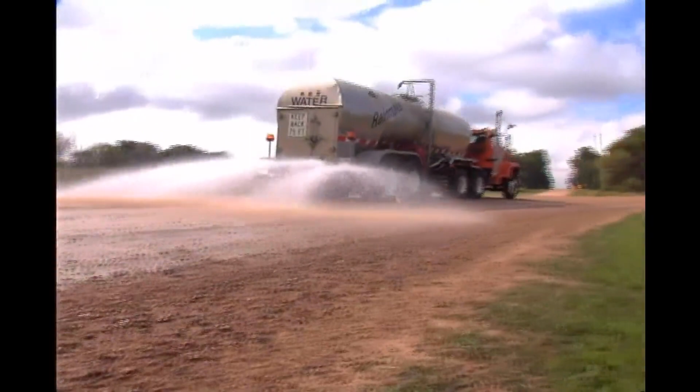When you bring in fresh gravel to resurface a road, you have to consider its moisture content. If it's too dry, you'll need to add water so it will take shape and compact. But if it's too wet, you'll have to work it with your motor grader so that some of the moisture will evaporate. Okay, let's review the main points about surface gravel.

About half of all problems on gravel roads are because of poor gravel, so be sure that you get good surface gravel. Each agency should adopt a surface gravel spec, and base aggregate is not good surface aggregate or surface gravel. You need the right gradation. Ideally, every piece of good surface gravel is smaller than 3/4 inch, and about 8 to 15% of your gravel should be fines. And you want enough clay in the fines for good plasticity.

You can't dig good surface gravel out of the ground. It has to be correctly processed by people who know what they're doing. When you get to the work site, you may have to adjust the content to make it work right and hold its shape. After you've reshaped the road and placed fresh gravel, you need to consider dust control. That's what we'll look at in the next section.

Okay, I'm going to resume. Okay, that's that problem. I'm going to resume sharing my screen. Okay. If you'll go to the aggregate classification map.

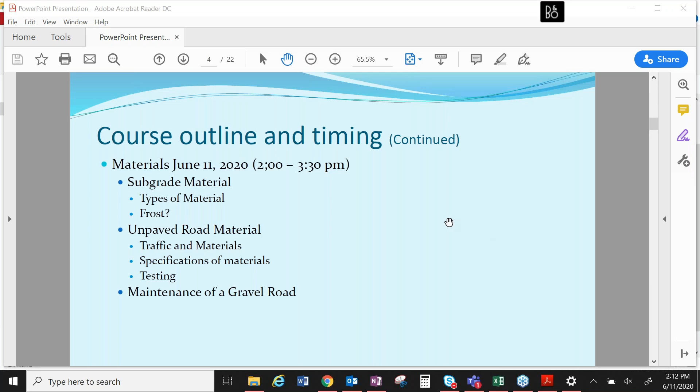Yep, we're there. Okay. So the narrator in the movie that you just watched is, of course, Ken Skorseth. He was originally the LTAP director in South Dakota. He's retired, but he developed a number of tools, and he was talking about the different types of soils and the need for a good gravel road surface to be a hard aggregate with enough sand and enough binder to hold it all together.

Bruce, I'm sorry to interrupt you, but I'm having an issue on mine now with the presentation. So I'm going to look at reopening the file. If everybody will just hang tight for one minute, I'm going to reopen the file and hopefully I'll get it to show again. I apologize. I was trying to adjust the size to make it a little bit bigger on the screen. Okay, I've got the image back now. So we're going to stick with this image size. Okay, so we're back to the aggregate classification map, and I will share my screen. It's showing that you guys are seeing it now. Sorry about that, Bruce. All yours. No problem.

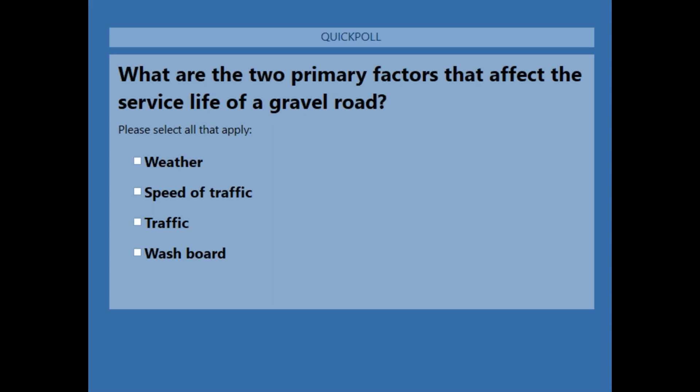A lot of people in the chat section, the question section, are saying weather, speed of traffic, and weather. That seems to be a big combination. It looks like our responses so far: 84% weather, 34% speed of traffic, 79% traffic, and 10% washboard. I just showed everybody what I shared, so the percentages are pretty close to what I read off.

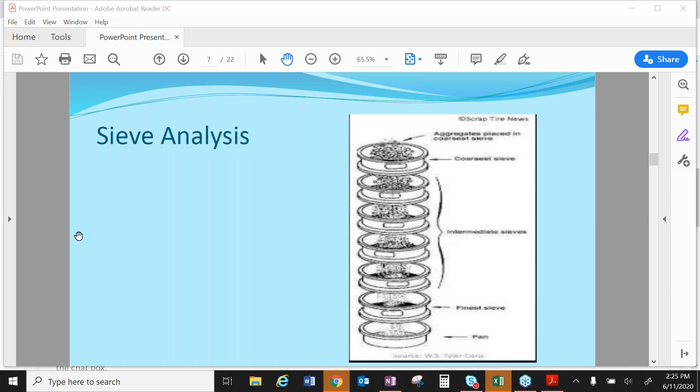Now, if we go to the next slide, I have some samples of some sieves here, and you take a look at the sieves, and the lower row of sieves are all, there's a 3/4 inch sieve, there's a 1/2 inch sieve. You can see that there's a larger gap between the screens, so that allows that size of rock to drop through that screen. So when you get into your cobble or your rock or your fractured stone, those 1/2 inch sieves, those 3/4 inch sieves, that inch sieve, those sieves are going to catch those larger stones and tell you what percentage you have of that and how much passes it.

Then what we do is, as we go down through and we get into what they call the numbered sieves, the number 4 sieve, the number 8 sieve, the number 30 sieve, what that means is that in 1 square inch of that screen, if it's a number 30 sieve, there's 30 holes in that 1 inch. So your material is going to be pretty small. And generally speaking, on your number 4 sieve, where you have 4 holes per inch of screen, you're going to have material that's just a little bit smaller than a 1/4 inch passing through it. You'll hang that 1/4 inch material up there on that screen.

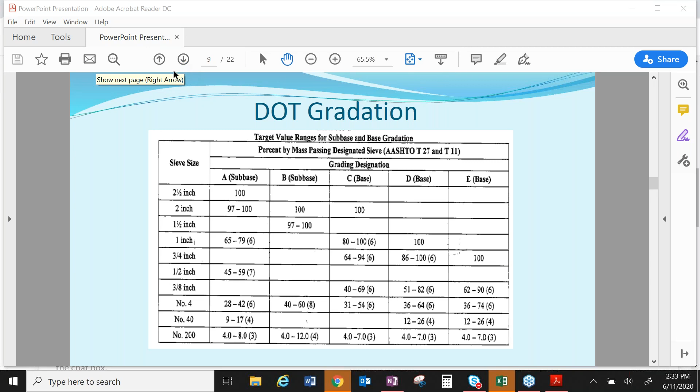And from a grader standpoint, that finer material allows you to get out onto that roadway, cut to the bottom of those potholes, the bottom of those washboards, and be able to remix that material back together, but then lay it out in a smaller depth, so you're able to get a little better compaction with it.

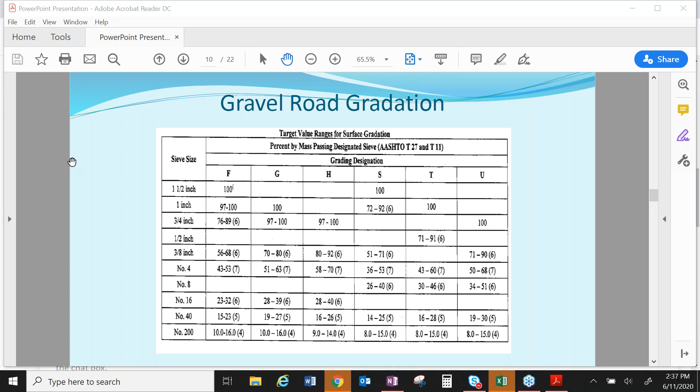Okay, so now let's go to the next slide here. So what we like to see in our surface gradation, we want a well-graded material, something that's going to have some good strong rock in it, some good sand in it, and then some good binder, and then has a good maximum density. We also need to find out what type of binder we have in it.

For an example, if you have silt and you have a lot of silt in your material, silt generally will absorb a lot of moisture, but it doesn't hold things together. And then it gives up moisture really quickly. And so a silt type of product will not give you a good binding in your aggregate. You need that clay type of material to really get that binding of your materials together.

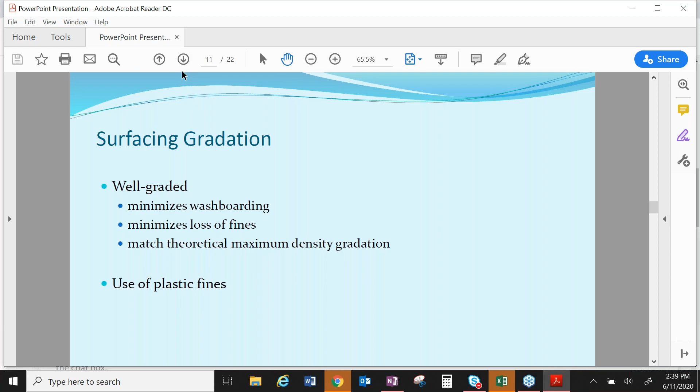So what I like to see agencies do is test your material. If you think about how much cost you have in your material, the cost of testing it is not that much. And doing a sieve analysis, an LA wear, a plasticity index type of testing is very important. So let's take a look at a couple of examples of those types of activities. So if you go to the next slide, a PI test.

They cut the material apart, they put a little water in, measure the amount of water, they cut the material apart, and then it clicks that little cup. And if that material starts to come back together, that means that they've reached the maximum moisture content for that material because it's starting to travel in that material. Then you take that material when it's moist and you roll it out.

Now, the rolling out part of this test, I actually do quite often out in the field. If I'm looking at a new gravel or a new type of material, I'll get a sample of that material, get rid of all the big rocks and a lot of the sand that I can get rid of, and have some of that material in my hand. Then I add a little bit of water to it and just mix that material up and start to see if it sticks to my hand.

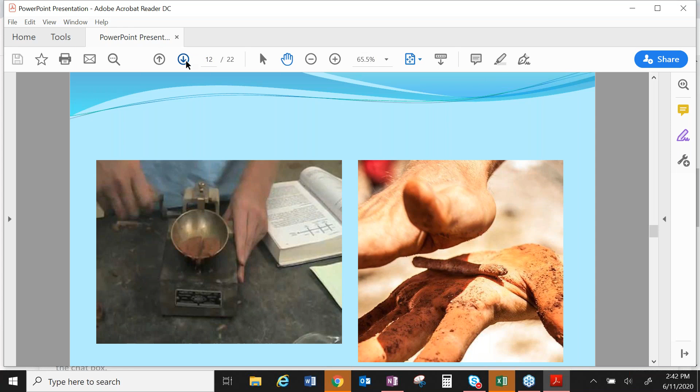And so you take a look at that PI, and if you have a lot of silt in your 200, you won't see that you have a really good plastic material, and so your number is going to be really low.

Now, the other side is true: if you have a high plasticity and your clay is expansive, you really don't want to use it because it's going to create an issue for you. So you need to keep your PIs in those medium types of numbers, and try and keep them out of the high plasticity and also the low plasticity types of limits.

So now I've told you a few tests that you may need to take a look at. So what aggregate testing does your organization currently conduct? Do you conduct an LA wear, a sieve gradation, plasticity indexing, cleanness value, or a fracture type of testing? Which tests do you normally perform in your organization when you're looking at aggregate?

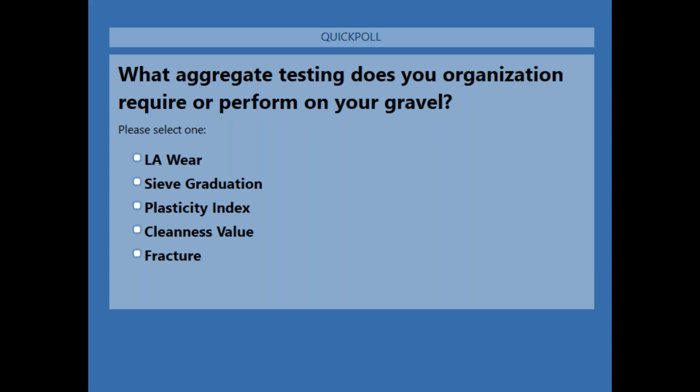Bruce, I think the screen's still catching up. It just put the survey up for them. Okay. But I got it up there if they can vote. We're getting some responses here. That's good. We get up about halfway with our voting, and I'll shut it down and share the results. Okay. I'm going to go ahead and close the poll down, and I will share the results.

The results hopefully are shared, and it said that we have no one that chose LA wear. 69% chose the sieve gradation, 19% chose the plasticity index, 9% chose cleanness value, and 3% chose fracture.

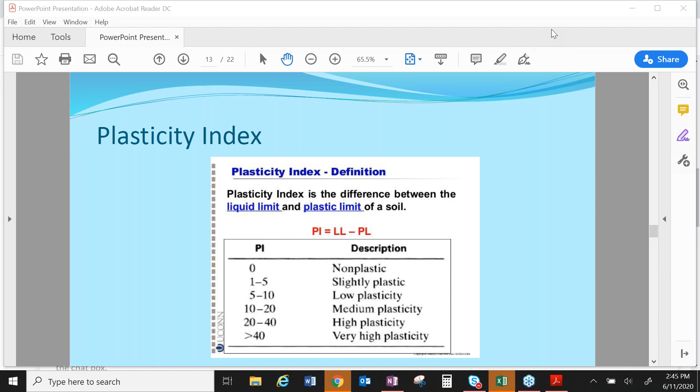So I'm going to hide that and put the slide back up. Okay, once you've hidden that, if you could go to the next slide, that would be fantastic. We're there.

So like we discussed on Tuesday, most of the jurisdictions that were at the class on Tuesday, on the design of a gravel roadway, indicated that they purchased their gravel. Now, if you're purchasing a gravel, you should have a standard specification for your coarse aggregate, your fine aggregate, your PI.

And in Ohio, some of your areas probably have a very difficult time getting a really hard, solid rock, because you look at the map that I had up earlier, and down along the river corridor you get into some really good hard rock. But by the same token, with some of your softer rock, you want to know what is in that rock, because with some of the real soft rocks like the shales, your traffic will just beat them and break them up. And as it breaks them up, it's going to create fines, and as the traffic travels down the roadway, they blow them off the roadway. And so you want to be able to have that good coarse aggregate.

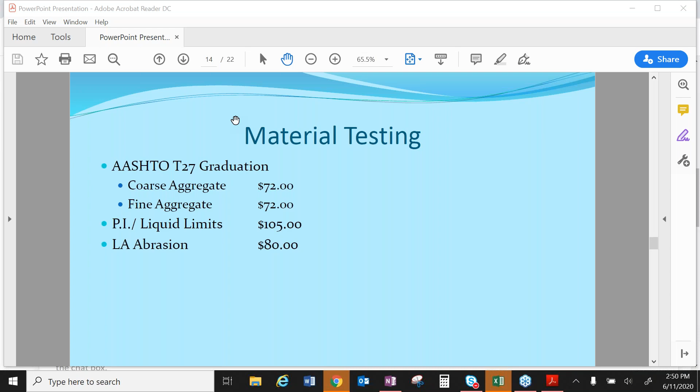And then they reweigh the coarse aggregate again, figuring out how much loss they had in size. And that's how they determine LA abrasion. And LA abrasion is going to tell you how long your aggregate is going to last in your roadway. So I like to see an LA abrasion test done on the aggregates you're going to use. So let's go ahead and go to the next slide.

What this is, is the maximum density curve. And what an agency can do, you can go out to the internet and type in maximum density curve. You can get a copy of this maximum density curve and then take your sieve analysis, and on the perpendicular portion of the chart, you have the percent passing a specific screen size. And then down on the horizontal axis, you have your screen size.

So you go in and you take your percent passing your number 200, and you put a point in there, your percent passing your 40, or your screens between that, and you plot your aggregates. Now, the black line that's on the chart, that's at the 0.45 power or 45 degree angle, should give you the best combination of all the different types of aggregates, the sands, and the clays to get a maximum density for that material.

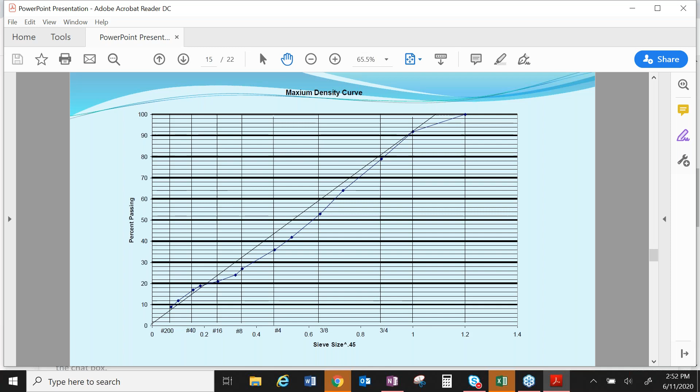And so the further your gradation goes away from that line, it'll tell you: if it's above, you may be a little bit short of that material. If it drops way below that black line, you may have too much of that material, and it's going to cause you some problems. So you want to plot that chart to indicate the specifications. You have a good combination of material. If we can go to the next, I believe it's the next slide.

I actually have an agency here in Idaho that I work with that quarries all of their aggregate. They blast this basalt and then crush it and create their aggregate. But because it's all solid rock, they have very little fines. And they have to create some of their fines by running it through the crusher a little bit more. And then they actually import their clay. They use bentonite. They bring bentonite in by train loads and then meter it into their aggregate as they produce it and then mix it up. And then they get a really tight bond on their aggregate.

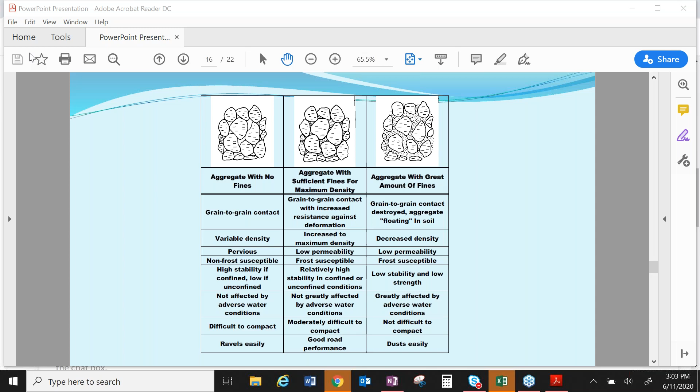Thanks, Bruce. Okay. So the material selection: every part of the United States, like the map that I had up shows, has very different types of materials. I know that in areas like Fargo, North Dakota, you have a lot of real heavy clays. You can get some good aggregates, but you've got to get out away from Fargo a little ways to be able to do that. And every time you're bringing material in from someplace else, of course, that's going to increase the cost. But you want to make sure that you're getting the product that you're paying for.

There's a lot of different specifications all over the United States and all over the world. Unfortunately, Ohio, as far as a gravel road specification, taking a look at the specifications I was provided for the Ohio DOT, their specifications are all for sub-base or aggregates or concretes, which virtually none of them are acceptable for an unpaved roadway. So hopefully your agencies have one, or if you don't have a specification, you might check with some of your neighboring agencies and see what they've come up with,

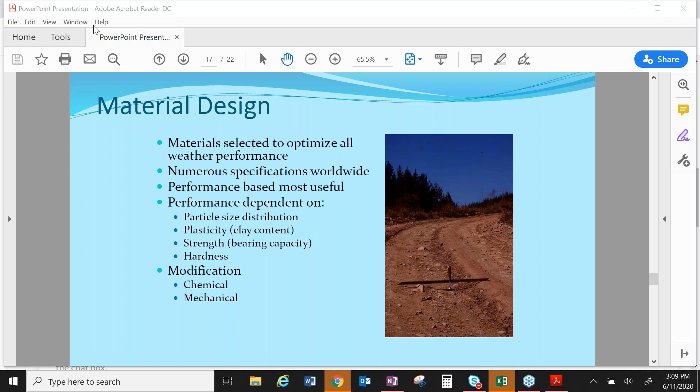Now, one of the things that Dave Jones has actually done, like I said, he has gone through and dealt with unpaved roadways all over the world. And he has developed this material design chart. So when you take a look at weighted clay factor, you want to be able to have between 100 and 365 as a weighted clay factor of how much clay's in that overall material.

You want to take a look at the distribution of the particle sizes and look at the maximum size, and this is, of course, in millimeters. Look at the strength factor. He's actually using the California bearing ratio, the CBR. You can use the LA wear as far as the hardness factor.

But you take that information, you take the BLS of the aggregate times the percent passing the number 40, and that gives you the amount of shrinkage product in it. Then you take the percent passing the 1-inch sieve minus the percent passing the number 8 sieve times the percent passing the number 4 sieve. Divide that by 100, and that'll actually give you a grading coefficient. How easy is that to grade, by the size and distribution of that product.

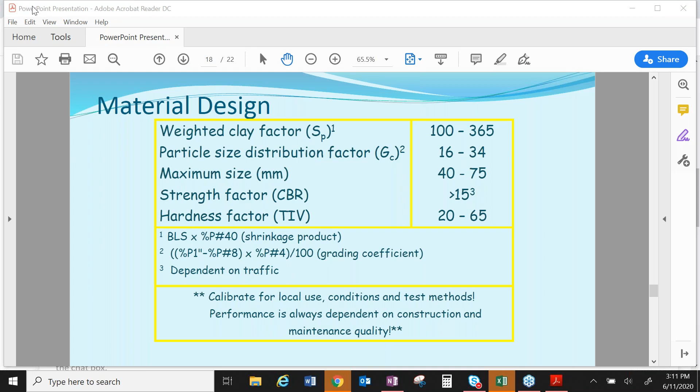Then what David has done is he's built up a chart where he has, on the vertical axis, his shrinkage product. On the horizontal axis, he has the grading coefficient. Going the wrong way here. So as the shrinkage product increases, it goes up that vertical axis, and then as the coarseness or the gap of the material increases, it goes along the horizontal axis. And by doing these calculations, you can go ahead.

Bruce, we had a quick question. They wanted to know, what does BLS stand for? Let me go back. The BLS is actually the amount of clay or the product passing the number 200 times the percent passing the number 40. So it gives you a percentage: the number 40 is your sand type of product, how much of your sand is in there, and then how much is in your number 200 sieve. And then you multiply those together, and that gives you how much shrinkage product you have versus your sand. Does that make sense?

We'll let them respond again in the box and let us know if they have any further questions. Thanks. Sounds great.

So you take that shrinkage product number, anywhere from 0 to 365, then your grading coefficient generally will be between 0 and 60, and you can actually plot it. And it'll tell you how your material is going to perform. So say you have a product that is very fine and it has no shrinkage product in it. It'd be down here in the lower left-hand corner, with 0 shrinkage product, and it's really fine, so it's not going to compact and grade real well. That'd be sand. And sand doesn't work real well as a gravel roadway.

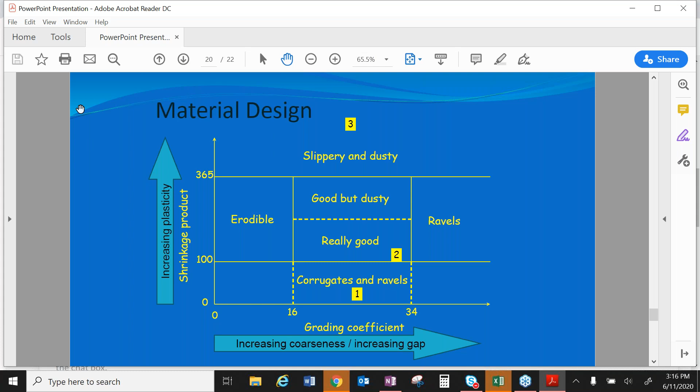Now, in the middle of the box is what they classify as a good product. It has shrinkage product, has some sand in it, has some rock in it. And so you have the combination of all the different products to make it into a good gravel roadway.

And then with the last one, which is raveling, you're going to see where you have some shrinkage product, but it's more rock. It's not going to be able to be bound together because there's not enough sand to hold it in place, and it's going to create a problem for you.

So Bruce, one question that came in, they'd like to know, is corrugation the same as washboarding? Corrugation, yes, it is. Corrugation is actually the same as washboarding, and that would be a roadway that you'd have the washboards in it because you don't have the clay in it to hold the sand and the gravel together.

And there's another question that came in, if you don't mind taking it right now. Sure. The person said, I wonder if the importance of fines are also valid in asphalt mixtures and pavement preservation techniques. Are these behaviors also valid for chip seals or slurry seals? Do fines play the same role in other applications such as chip seal?

Well, the chip seal is a little bit off course, but by the same token, it's a very good question, and I'd like to address it real quickly. Generally speaking, on a chip seal, you want to have a clean aggregate, because if you think about applying that chip seal, you're normally using a chipper, and it has a roll in the bottom of it that brings that material out and puts it down on the

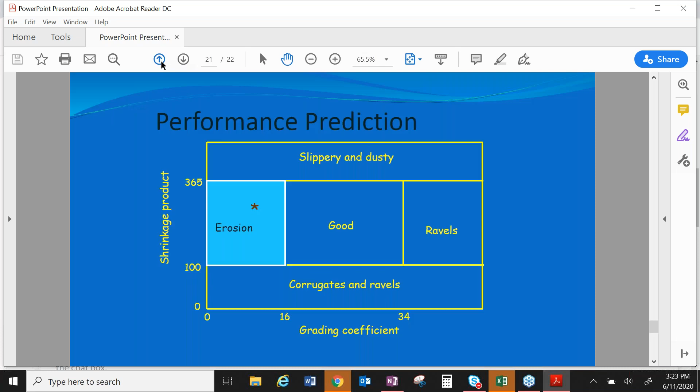Now, here's an example. This is a roadway that has a very median grading coefficient. It's not bad as far as grading, but it doesn't have any real clay in it. It's going to tend to ravel and corrugate. Or a product that is up there in the number 2 area, where it has some clay in it and a good grading coefficient, is going to be a fairly good road surface. You're going to be able to compact it, and it's going to hold up for you.

And then, of course, if it's up in that number 3 area where it's really high in clay content, when it rains, it's going to get slippery. And in the summertime when it gets hot and dry, it'll get really hard on the top. But if you run a grader on it, you're going to create a dust bowl.